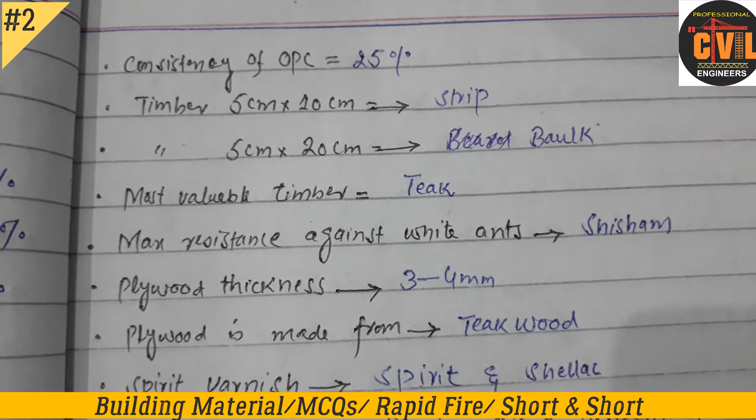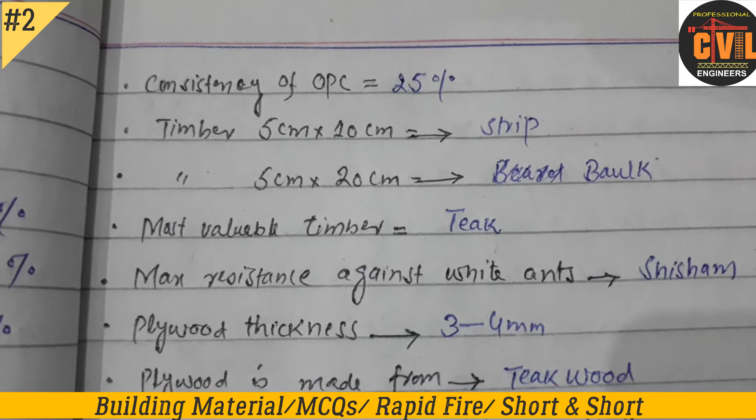I am Engineer Shamsur Rahman, and today we will discuss the second part of the rapid fires of building material. Okay, in this, first is consistency of OPC. Ordinary Portland cement. So consistency of OPC is 25%.

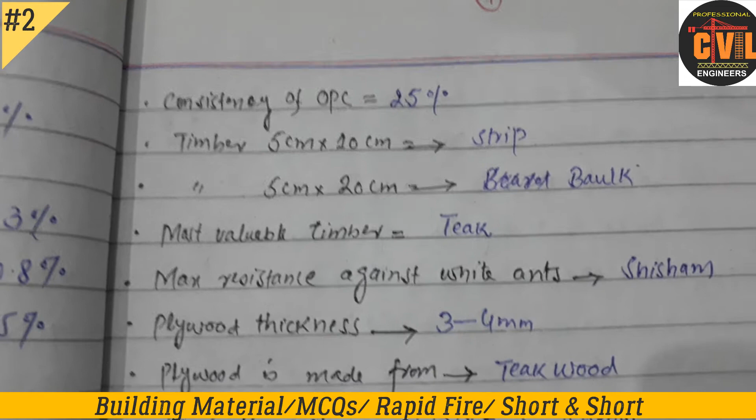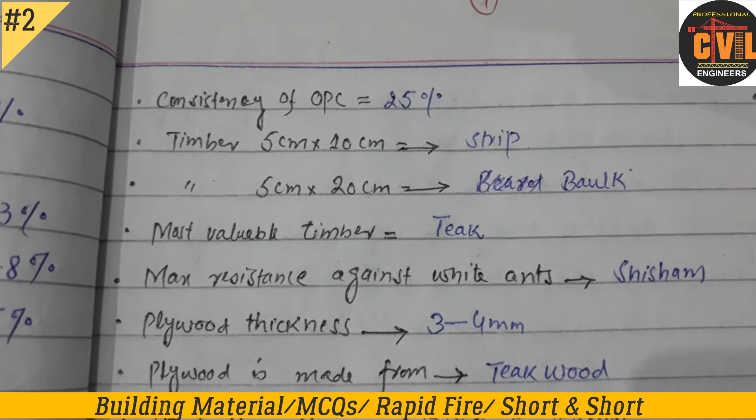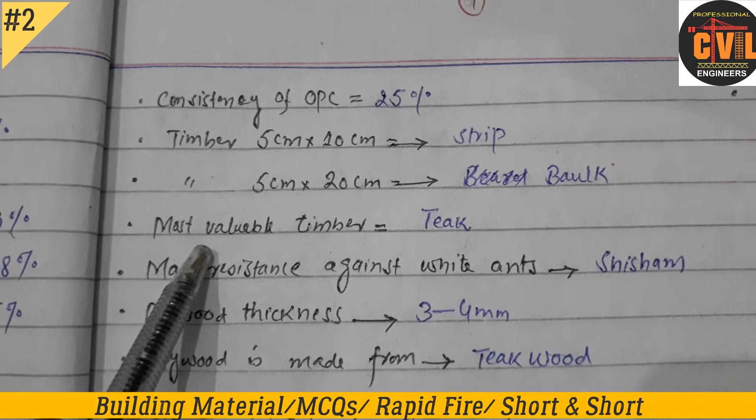Timber type which is 5 centimeter by 10 centimeter, it is called strip, and the timber which is 5 centimeter multiplied by 20 centimeter, it is baulk. Okay, now if you have question that most valuable timber is what, there would be options that it is shisham, teak wood, deodar, etc. Then you would select the teak.

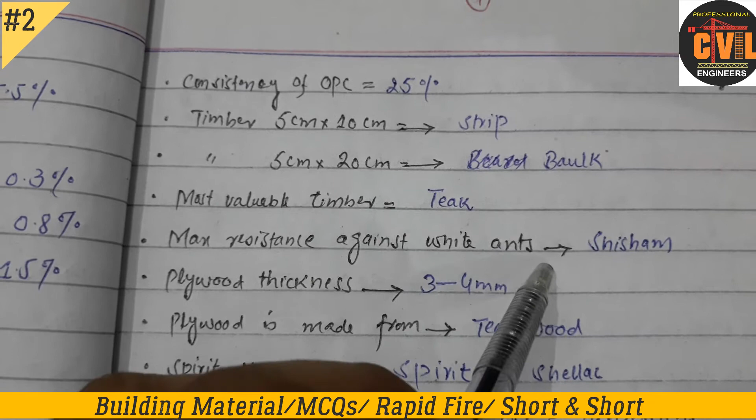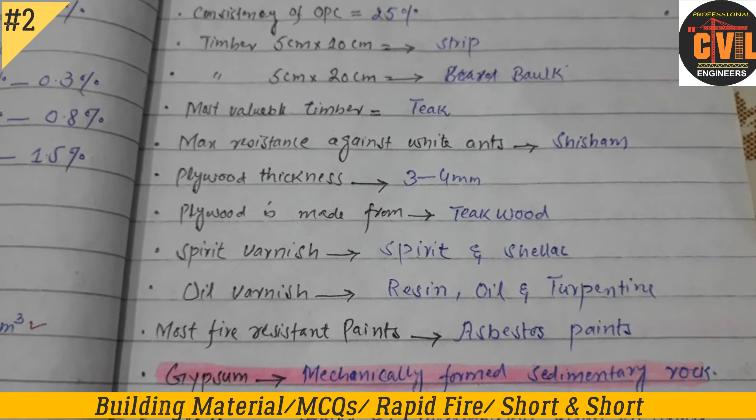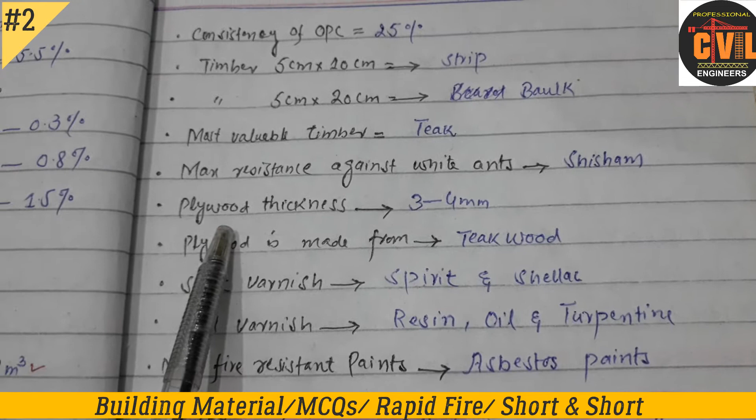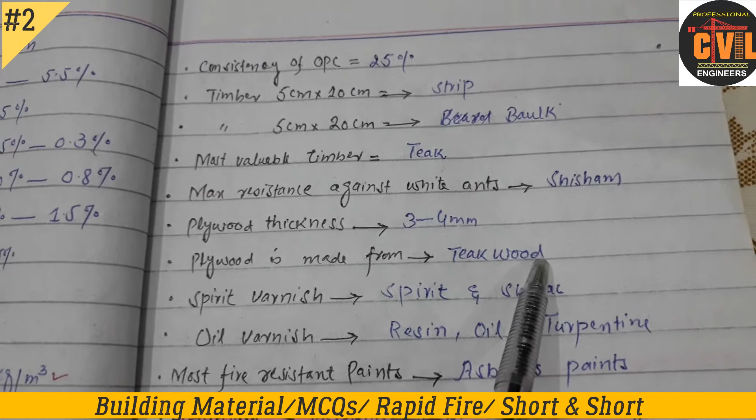Okay, maximum resistance against white ant, it is shisham. These are two important MCQs. Maximum resistance provided against ants by shisham. But the most valuable timber is teak, and teak is also used in furnitures. Okay, plywood thickness, it is from 3 to 4 mm. Plywood is made of teak wood. So you can see that most valuable timber is teak wood, and plywood is also made of teak wood.

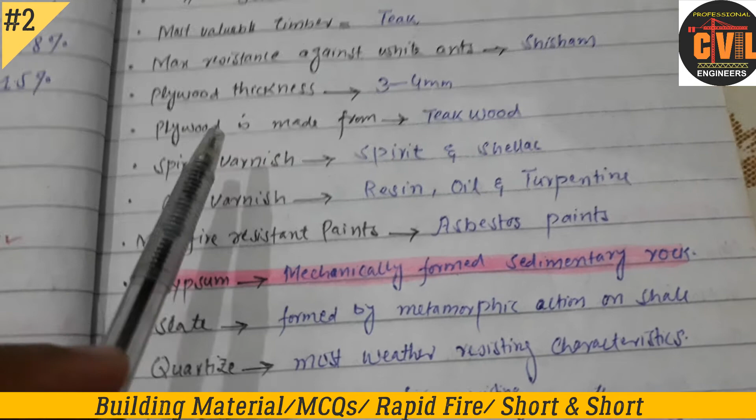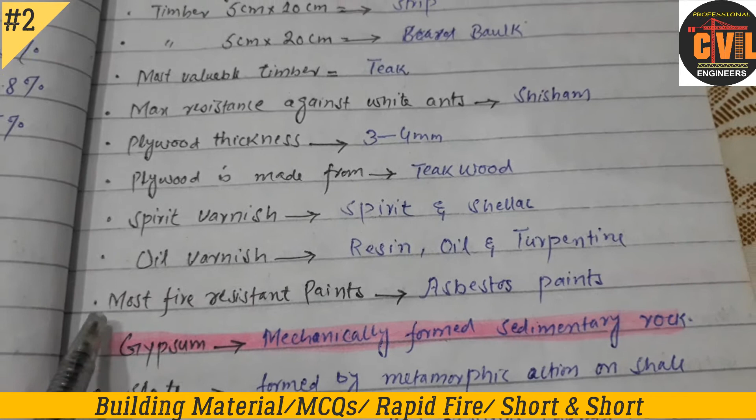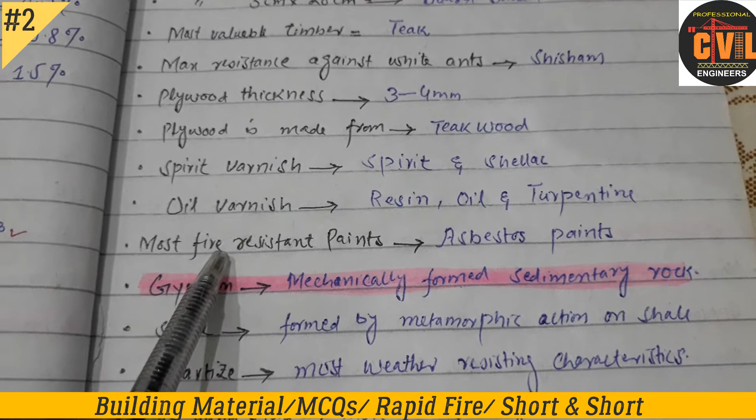Spirit varnish is made of spirit and shellac. Oil varnish is made of resin, oil and turpentine. Most fire resistant paint, this is asbestos paint. The paint which gives more fire resistance is asbestos paint.

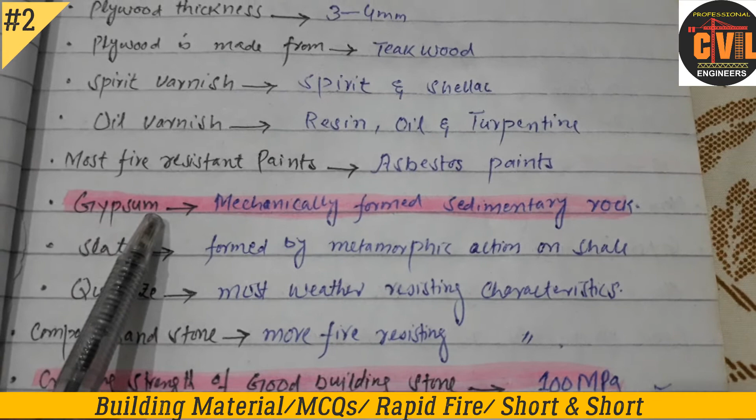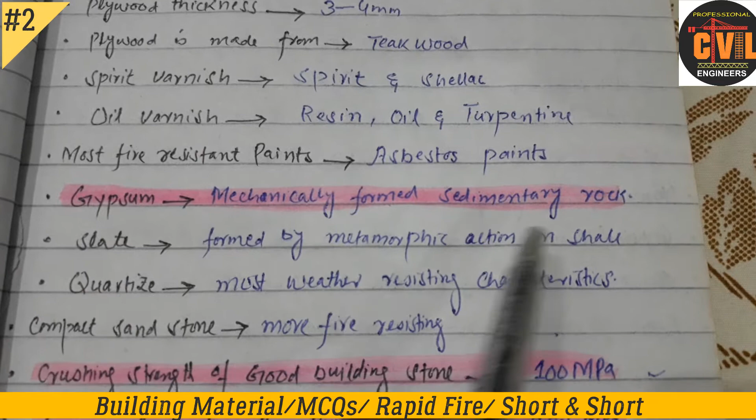Okay, gypsum. How gypsum is formed? Gypsum is formed by mechanically formed sedimentary rocks. Slate is formed by metamorphic action on shale. Shale is sedimentary rock, but by metamorphic action, it is changed to slate, which is metamorphic rock.

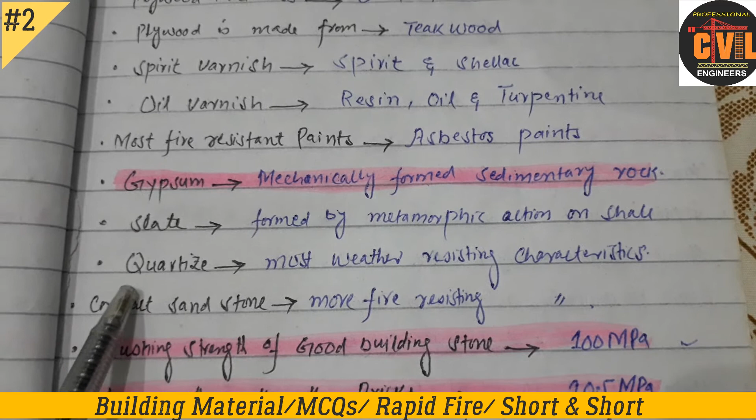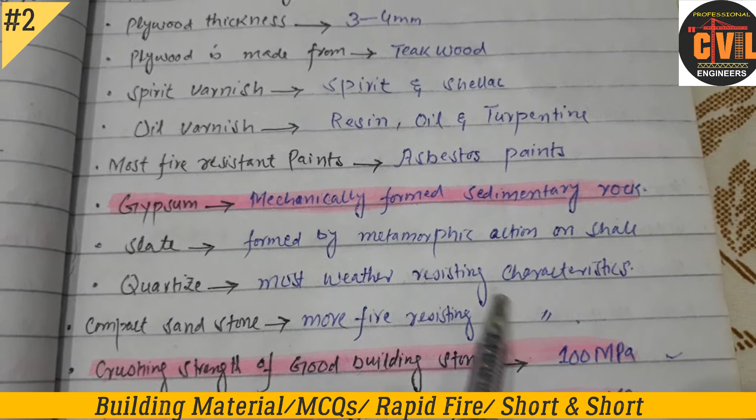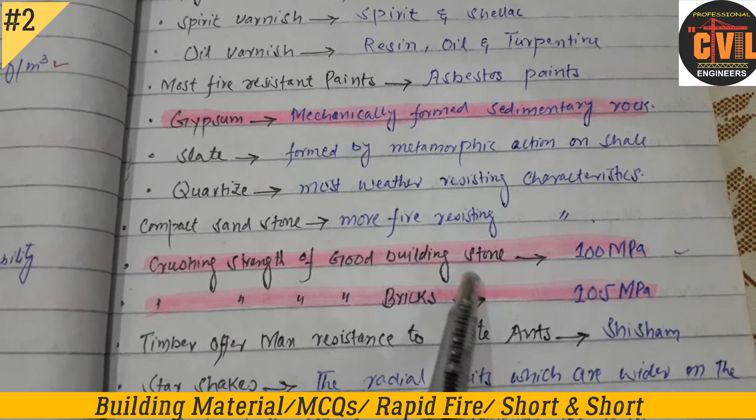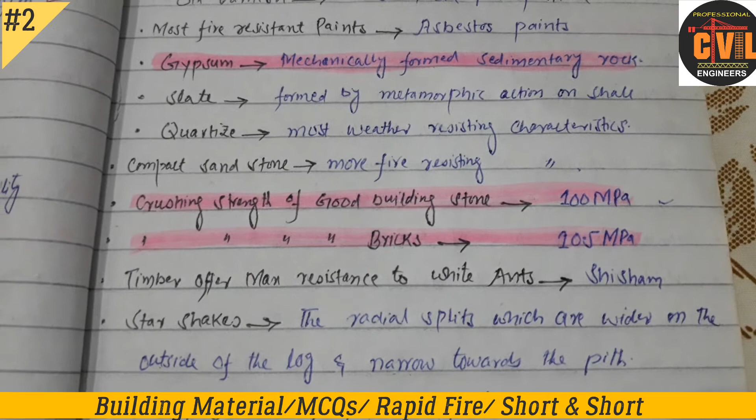Quartzite, most weather resisting characteristics. Compact sandstone, it has more fire resisting characteristics. These are two types of rocks. Quartzite have most weather resisting characteristics, and compact stone have more fire resisting characteristics. Now, crushing strength of good building stone is 100 megapascal, and crushing strength of good brick is 10.5 megapascal. Now you can imagine how much stone is stronger than brick.

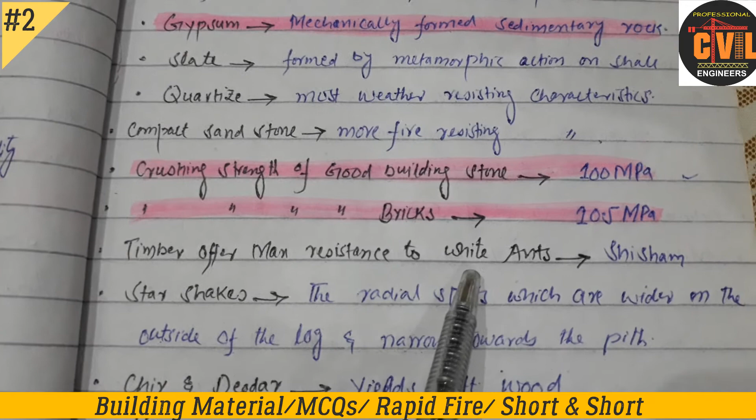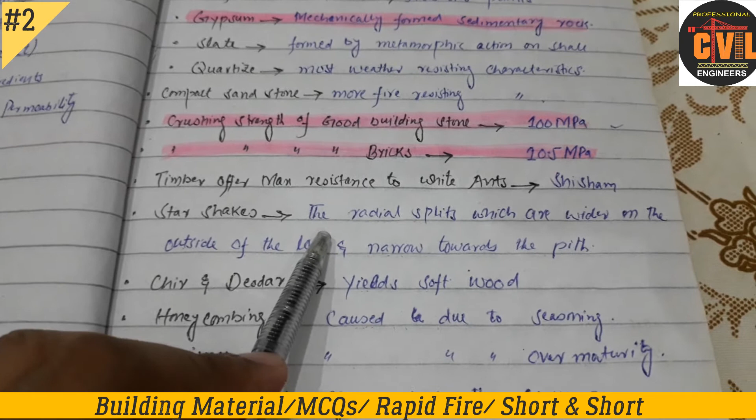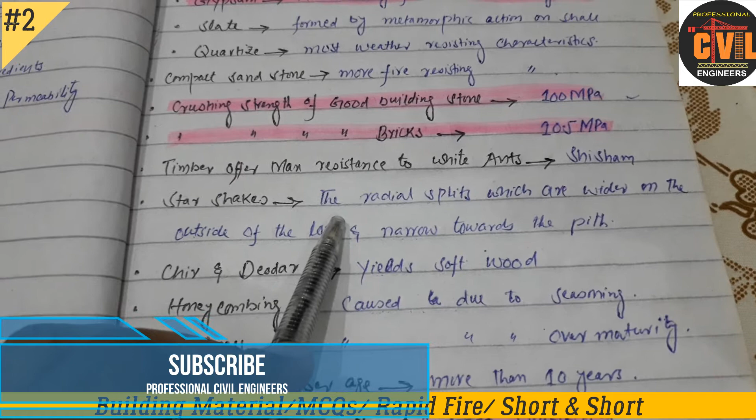Timber offering maximum resistance to white ant is shisham. Already we discussed here, you can see. Okay, now star shakes, radial shakes, heart shakes, these are the defects of timber, the diseases of timber. And what is star shakes? The radial splits, which are wider on outside of the log and narrower towards the pith.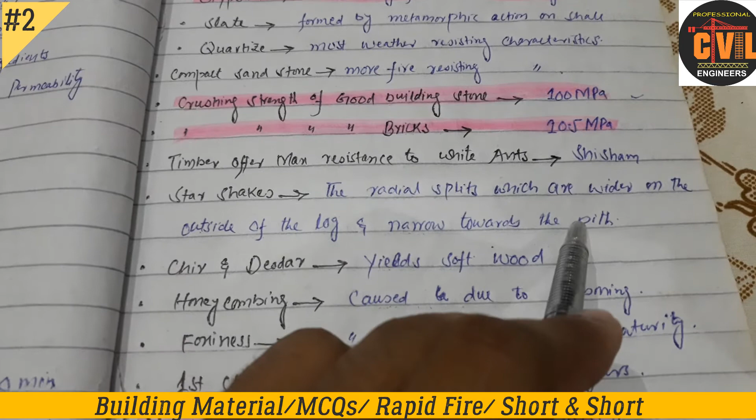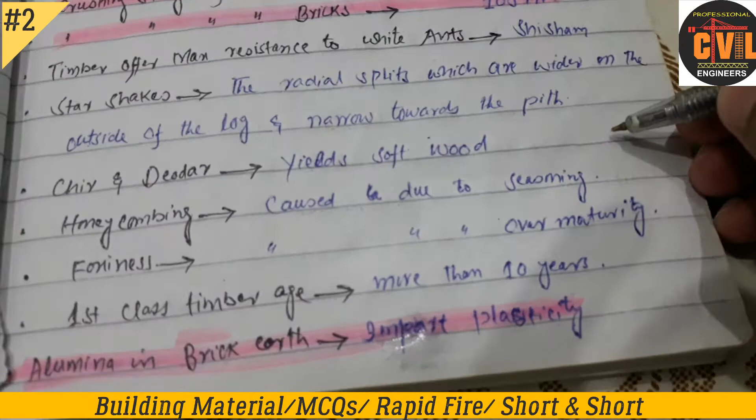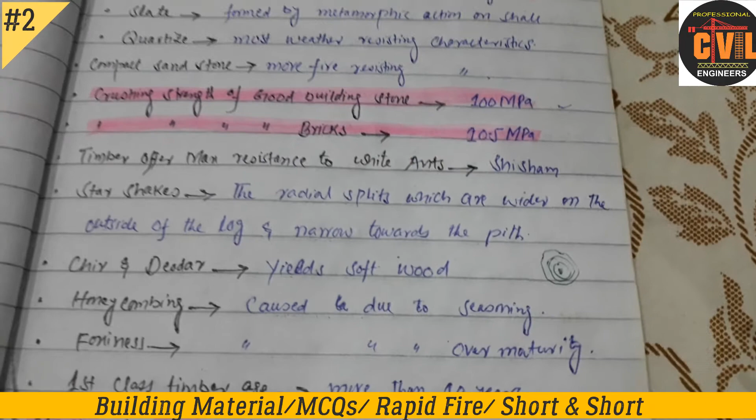Pith is the center of timber. Timber is in layers, like these layers, and the mid point is pith. So these radial splits are wider on outside but narrower towards the pith. So this is called star shakes. Chir and deodar, these are soft woods, types of soft woods.

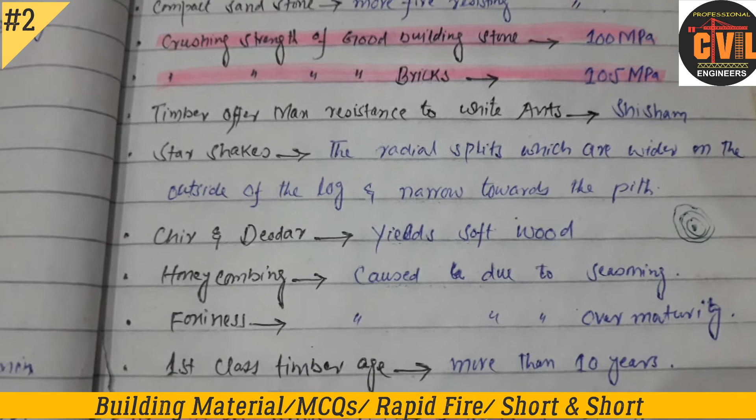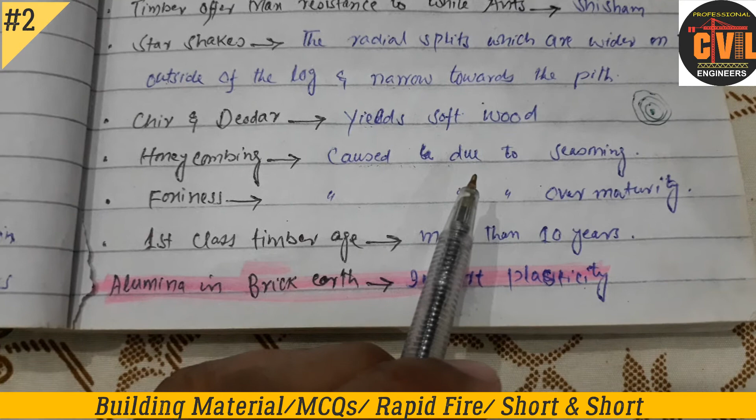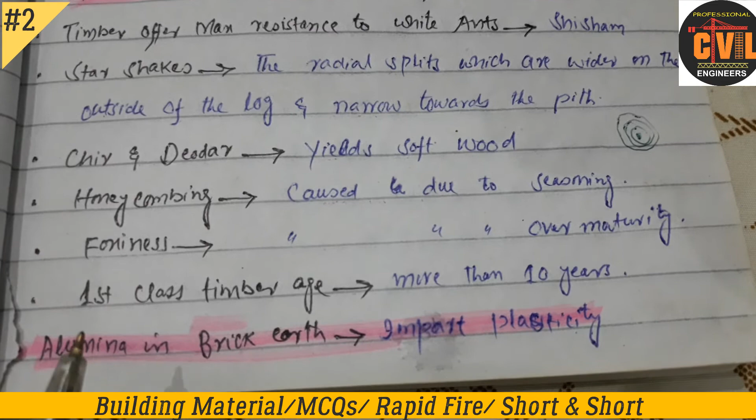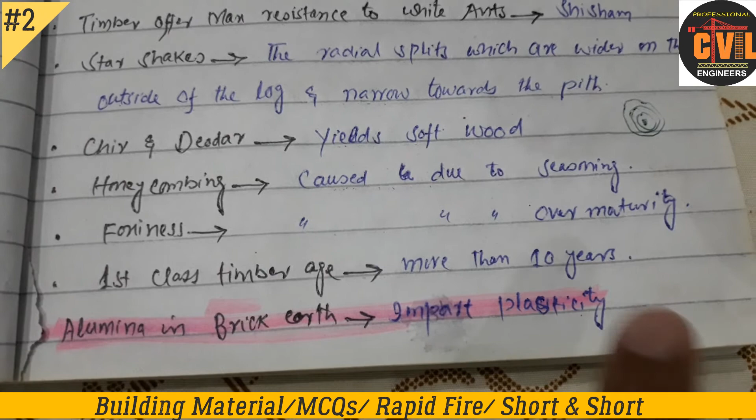Honeycombing in concrete is something else, but honeycombing in timber is due to seasoning. This is the defect or disease of timber. Foxiness, this is also a disease of timber, and it is caused due to over maturity. First class timber age is more than 10 years. Okay, alumina in brick earth imparts plasticity. What is the function of alumina in brick? It gives plasticity to the brick.

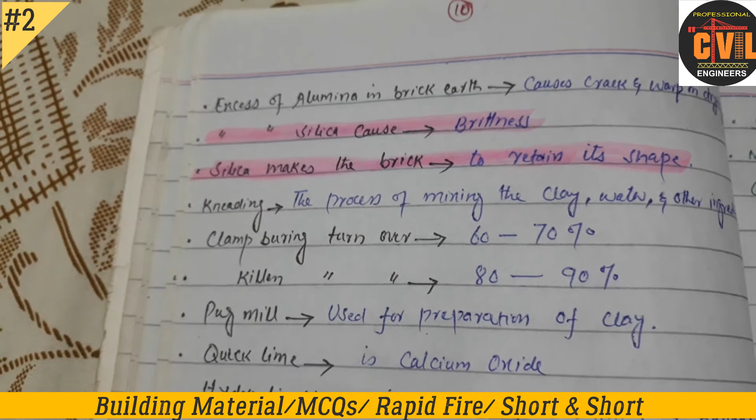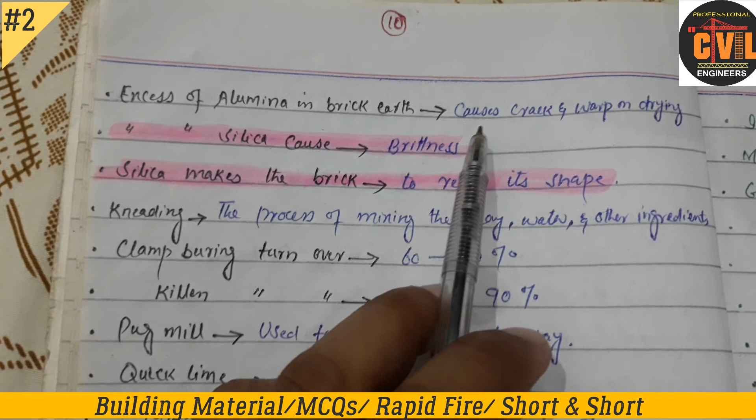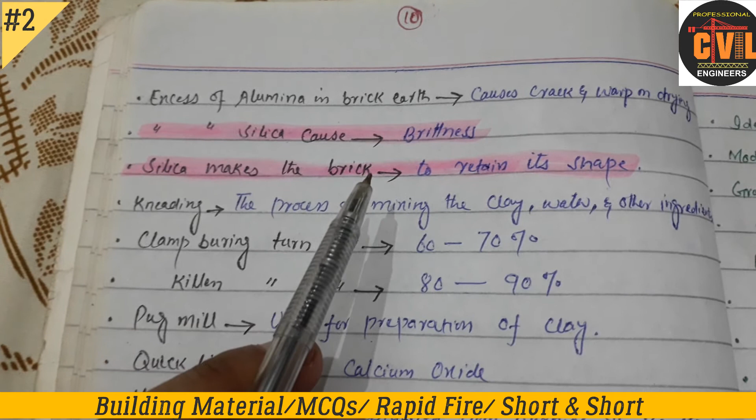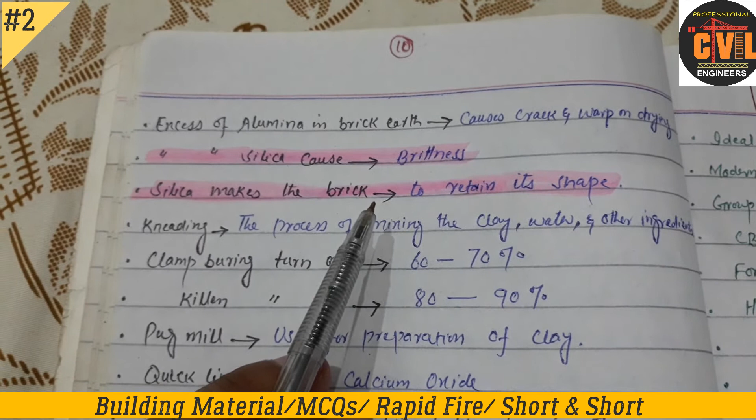Now excess of alumina in brick earth. As we discussed before, the function of alumina in brick is to give it plasticity, but if it is in excess quantity, then it causes cracks and warp on drying. Excess of silica causes brittleness. Silica makes the brick retain its shape. But if it is in excess quantity, then it would give brittleness to the brick.

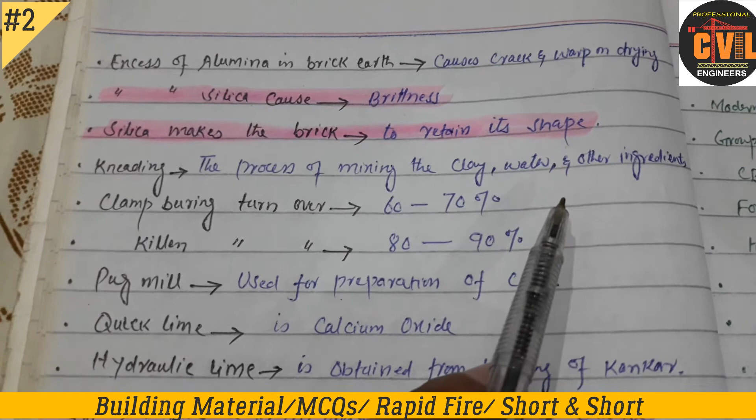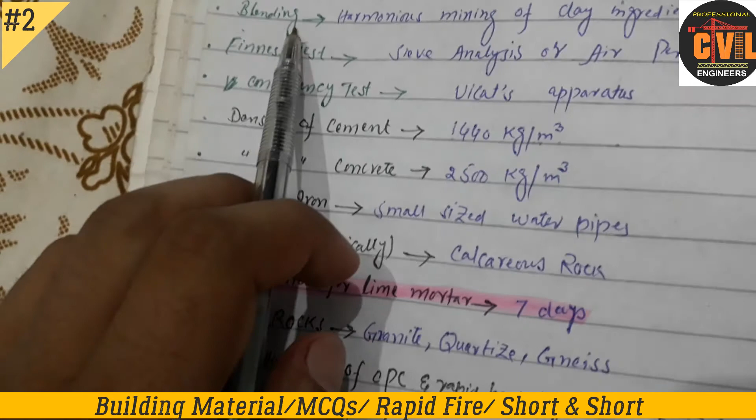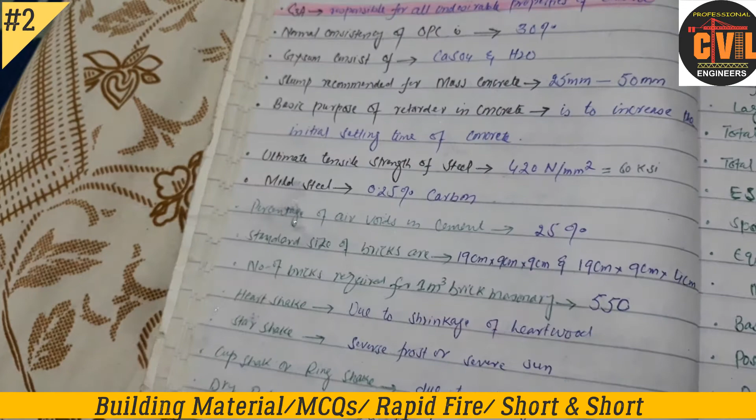Kneading, the process of mixing the clay, water and other ingredients, this is called kneading. But the harmonious mixing of clay is blending, which we already discussed before. Blending was the harmonious mixing of clay ingredients. This was in the part 1 video of the rapid fires of building material. So the process of mixing the clay, it is kneading.

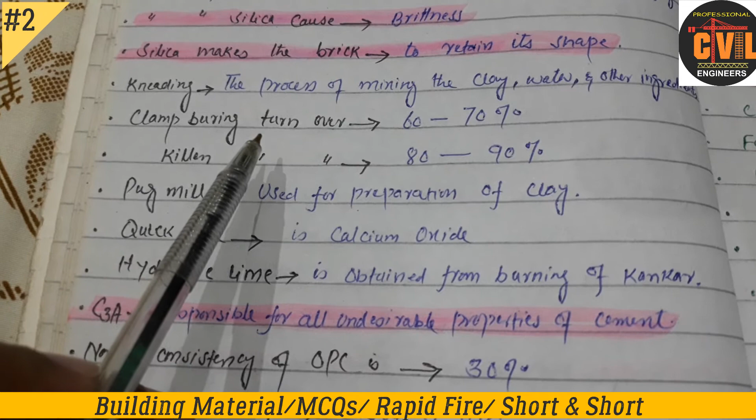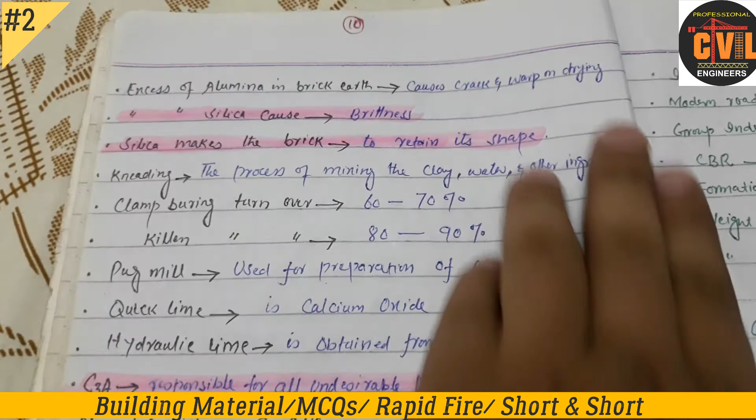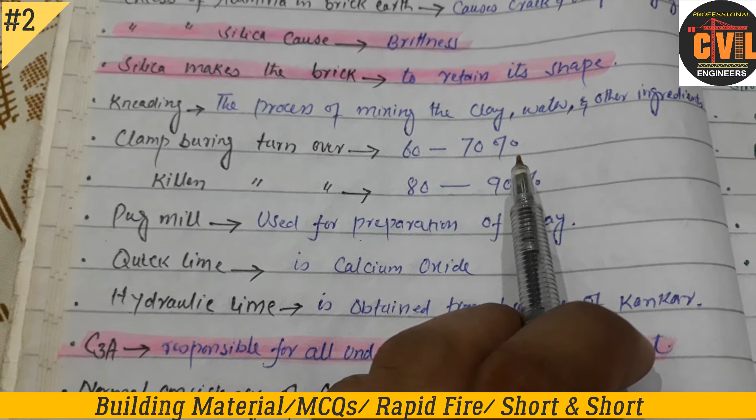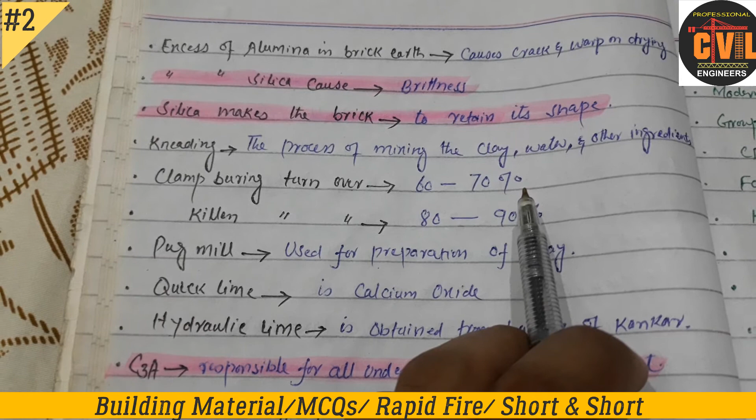Burning turnover, and kiln burning turnover. There are two types of kilns. We are burning the bricks in two types of kilns. One is clamp burning, and in this we get the turnover of 60 to 70%. I mean, we are getting 60 to 70% of bricks in good quality. The remaining 30% are the mixes of kacha bricks and overburnt bricks. But in kiln turnover, it is 80 to 90%.

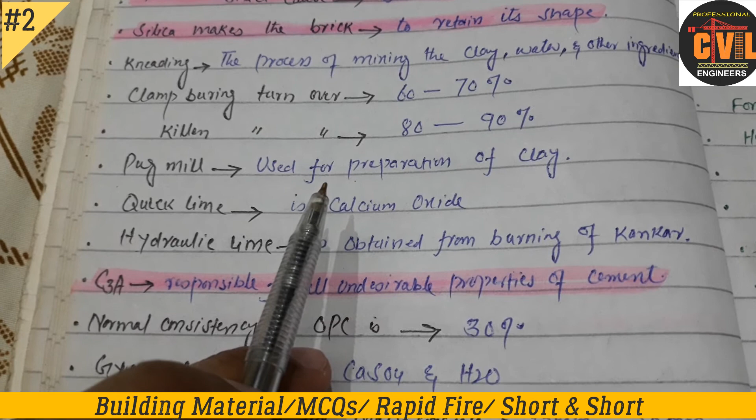Pug mill, used for preparation of clay. If you have more clay and you cannot prepare it by hand, then we prepare this by pug mill. Okay, quicklime is calcium oxide.